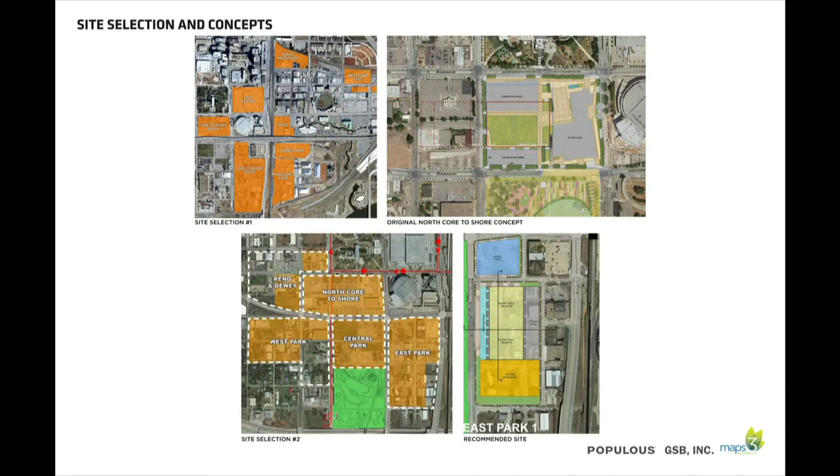Which we all know was the right move. It really has helped strengthen that idea of core to shore and development around the new park, which is really awesome.

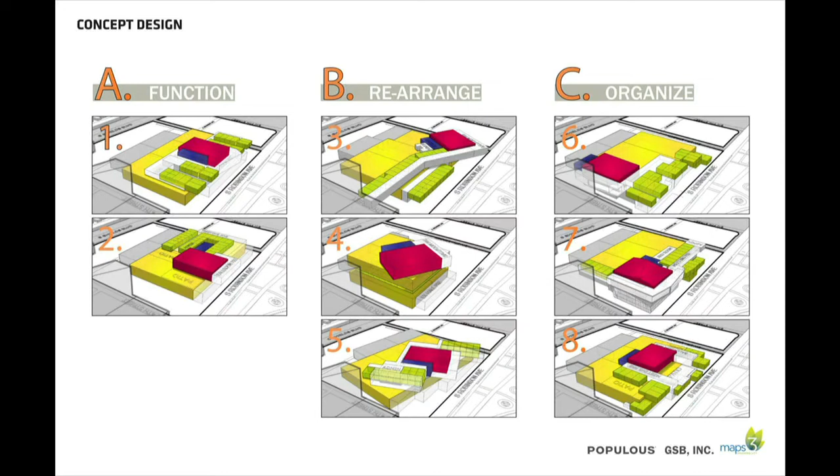So we went through a lot of iterations of concept design. We did most of this with our subcommittee, working through different stacking diagrams showing how the layout of the building could work on the site. We then narrowed that down to three specific options that we shared.

The different locations for the ballroom really stood apart among these three options: in the center, more to the north by the hotel, or to the south looking at the park.

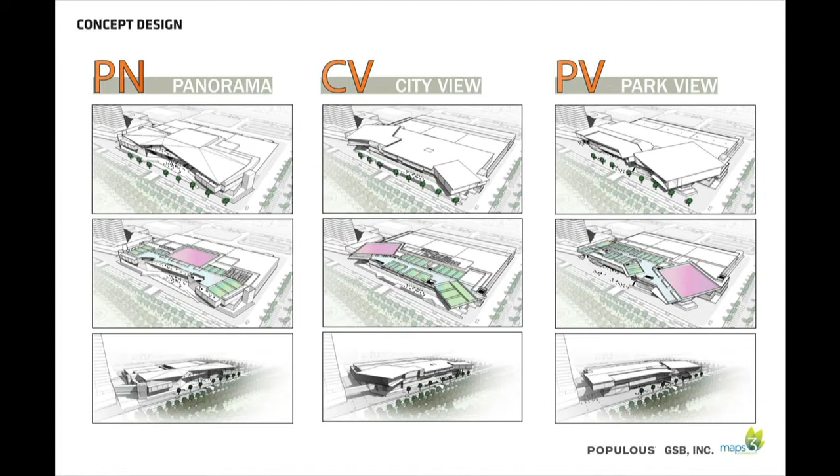We merged all three of those into one overall concept idea, which is what you see here and what we have today, with the ballroom up on the top floor, centered, with meeting space on each side and the exhibit hall at grade.

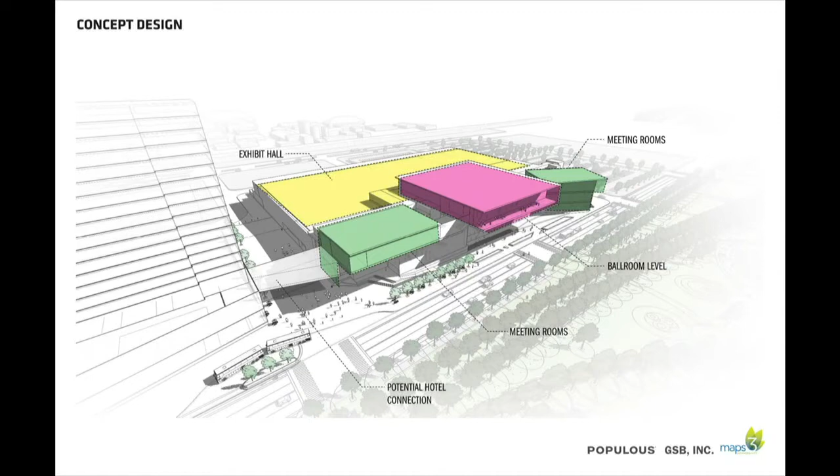The other thing we did at concept design with our subcommittee was develop these design principles. We hit on these every time we met with them to make sure we were addressing what they thought was most important for this project.

From the unique visitor experience to the pedestrian district, to division of shows, the elevated ballroom, urban integration, park connections, the ability to expand, and development opportunities.

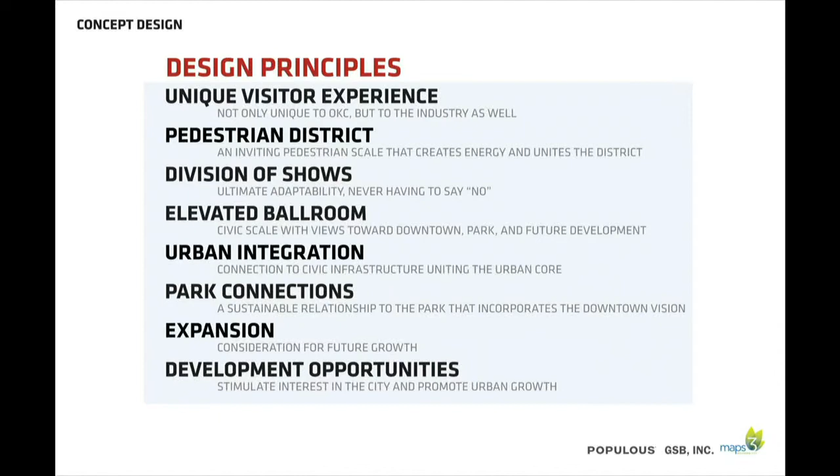Looking back, I think the project achieves all of these things today, which is great - we were able to hold these principles and carry them all the way through construction.

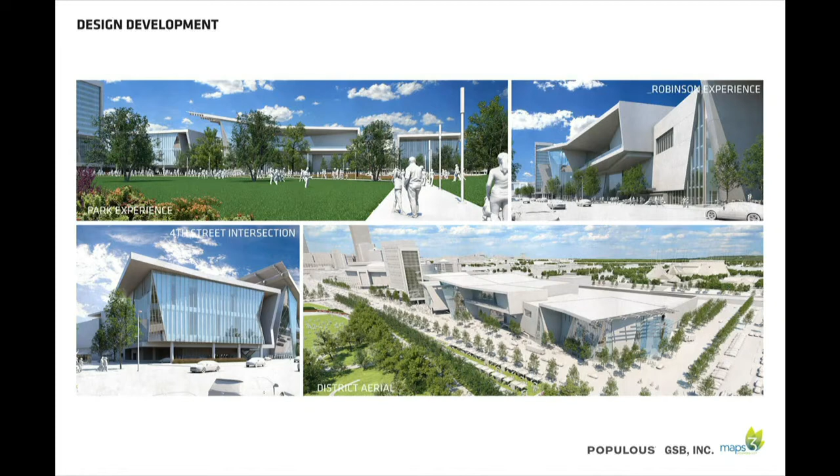The other thing we looked at was the design story for the area - the core to shore vision that the city had - and then the earth, horizon, sky design story that we added for this building.

We looked at different precedents around the city for ideas and materiality we'd seen, and different notions from the earth - the ground floor - the horizon - the level 2 meeting floor - and the sky - the ballroom floor.

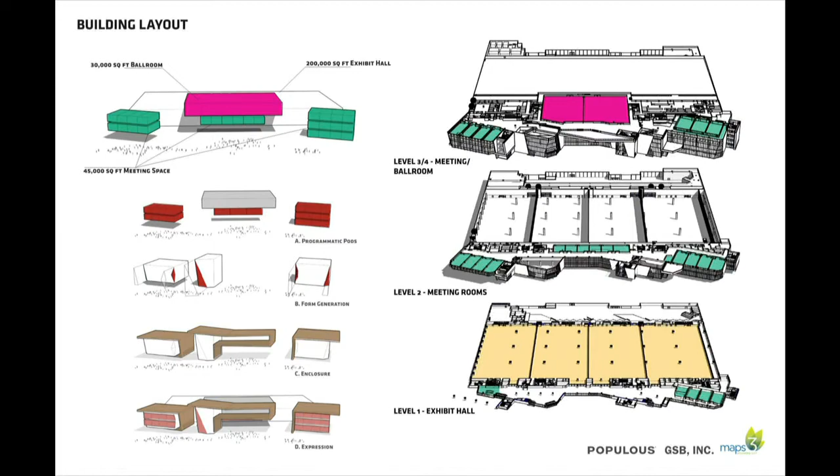As we got into construction, this building broke ground in June of 2018. Six months later, a lot of that was just clearing the site, working on utility work and foundations. But by December, six months later, we started to see things pop out of the ground.

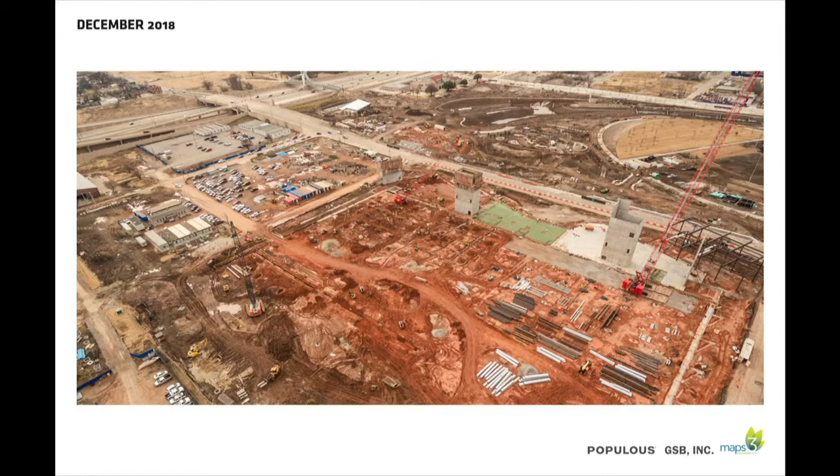You had the elevator towers going up, and you start to see some steel there at the northwest corner. Then it only took about 6 or 7 months later, and we were at the topping out ceremony of steel - we had all of the steel pretty much done in about 7 months.

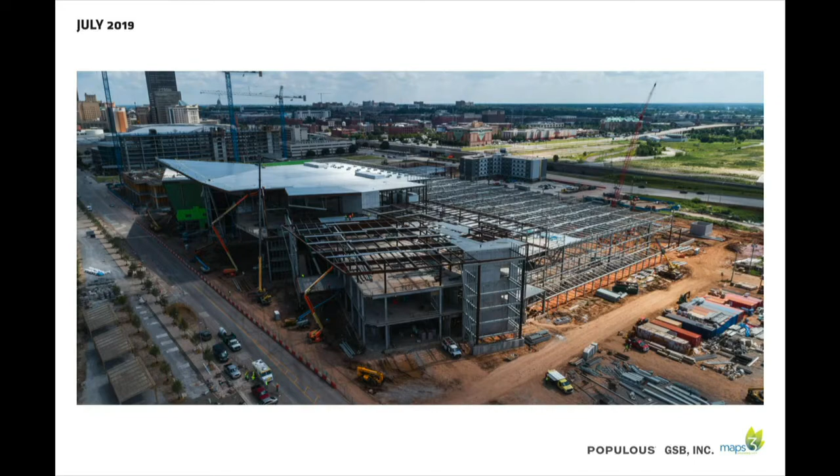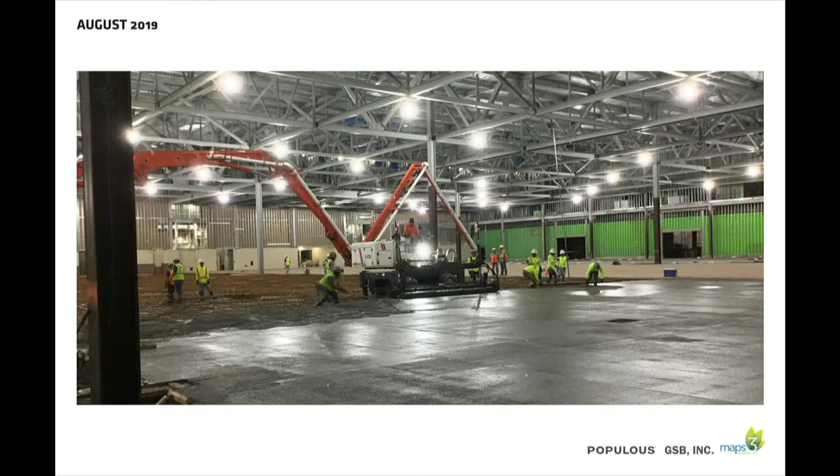The concrete was 8 inches thick and needed to be able to cure in the cooler weather. Here we are 4 months after that, and the building's basically got its shape. The roof is done, the facade is starting to go up, and we're getting into the final stretch of building out the interiors.

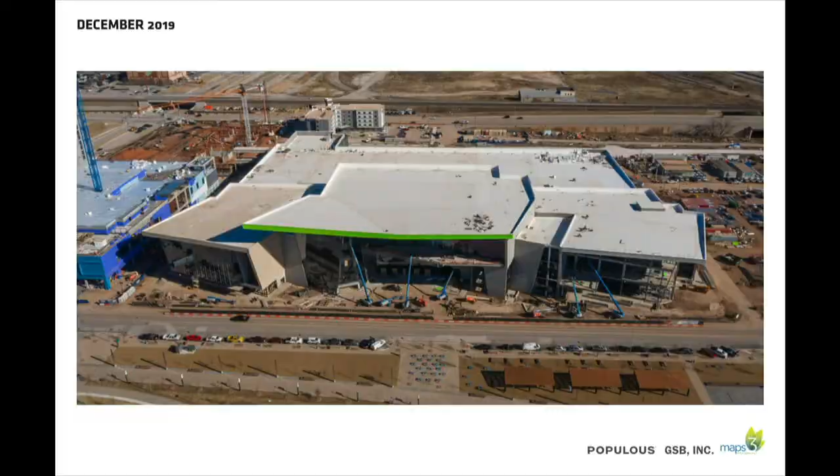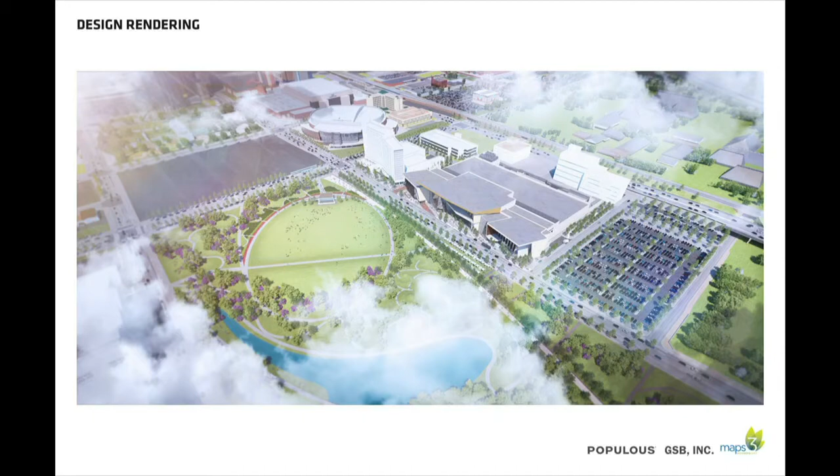Let's look at some exterior views for the project. It's really interesting to look at some of our original design renderings and compare them to what was really built out there. With this aerial image of the site, compared to what you have today, it's tremendous to see how this development has happened around the whole building, the hotel, the park, and other things that are now popping up.

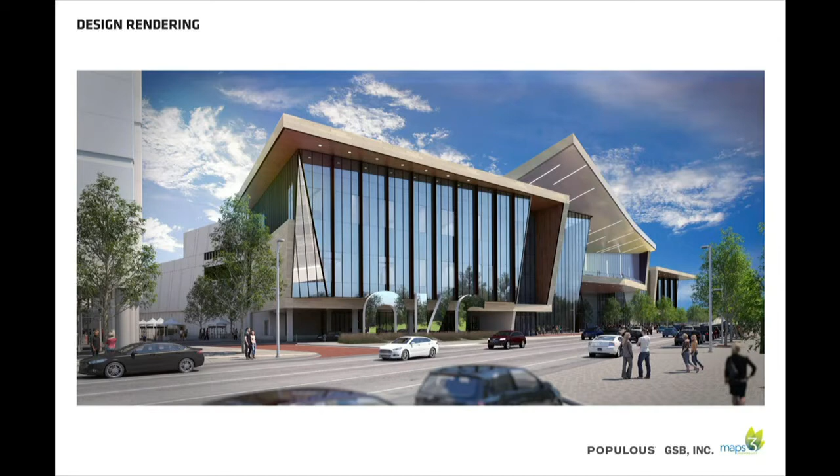This was one of our earlier renderings at the northwest corner. You see the big OKC sign—that was something we ended up not doing, along with some other small changes. But what you have today is really similar.

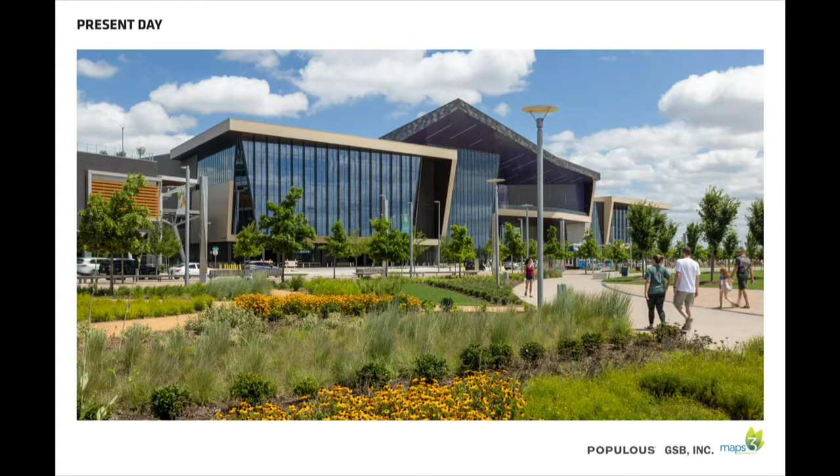It's really great to see the reflection on the glass from that rendering, and then to see it in person here. And just another view of how the park, once it got really thick and lush, really enhances the front door of this building.

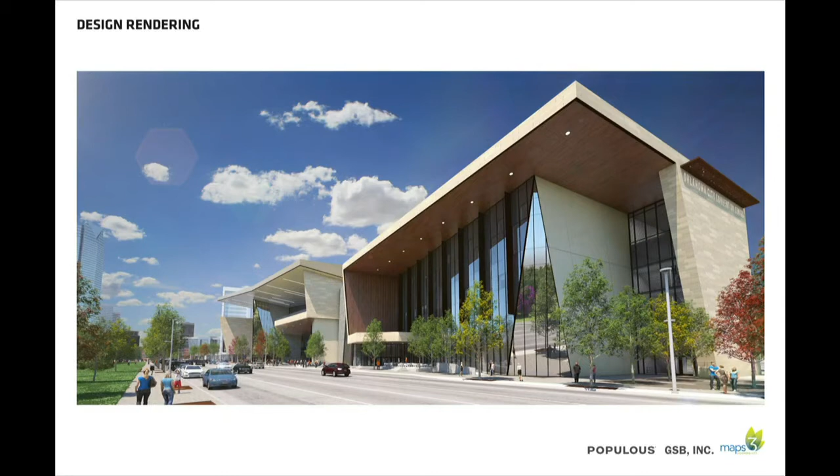Here we are at the south end, looking north down Robinson Street, and then you get that same view with what was built today.

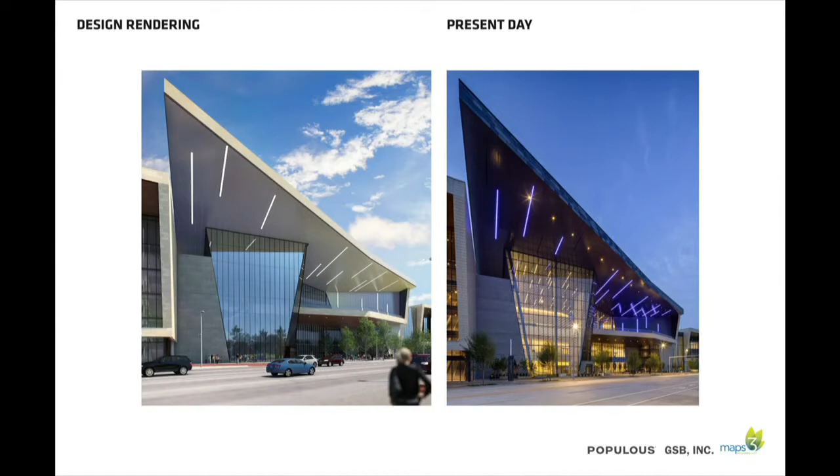The large cantilever over the building—the rendering on the left and the picture on the right—it's really impressive to see how far out that corner of the roof sticks out up and over the road. Our structural engineer likes to say it's an aggressive cantilever for the building, so I think that's a good thing.

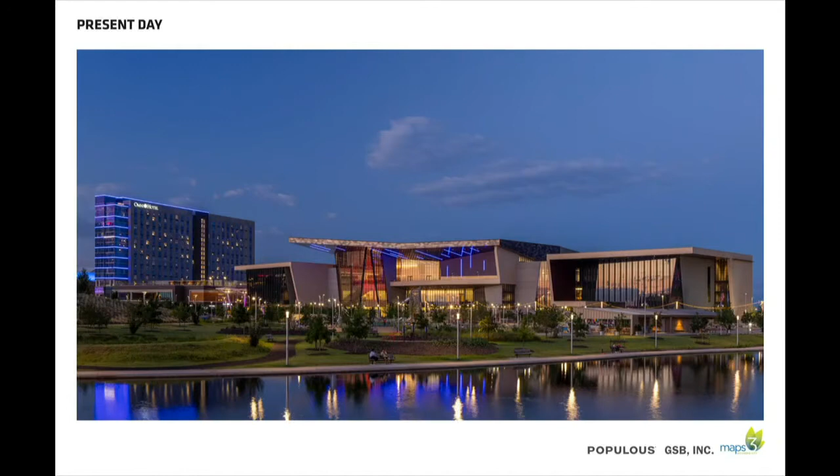And then just some of the wonderful views from the park, with the lake in front of it. And the lighting at night—how this building, the hotel, and the other buildings in the area really talk together with their looks and their lighting.

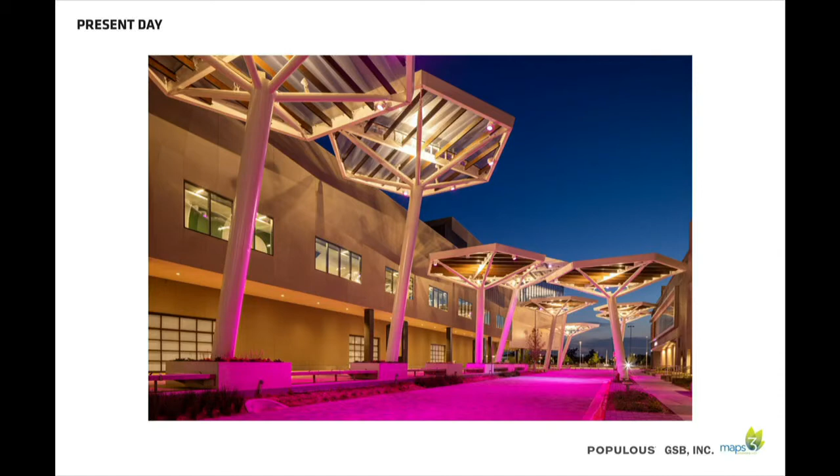The 4th Street canopies were one of the additions we added to this building because of some additional funds we had. Adding these amenities on the north side is really neat and dramatic.

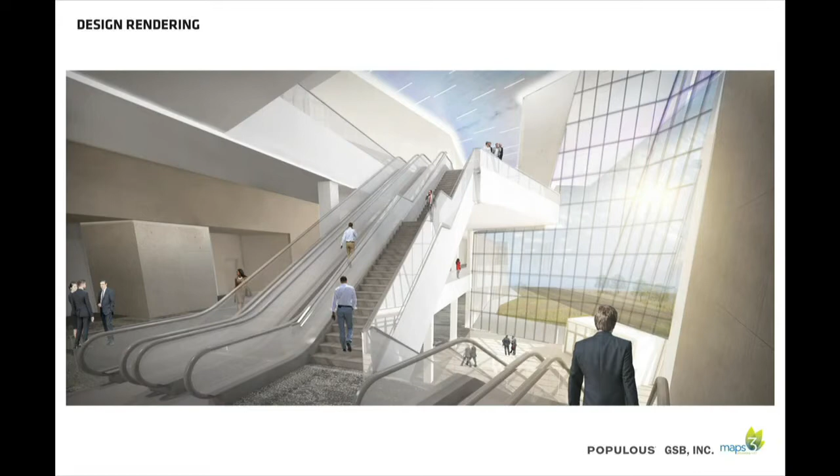You get to see the floor, you get to see the glass, and then here it is today—you get that same sense. But the addition we didn't have in the rendering is that art piece, which is phenomenal at both atriums. Having the virtual sky piece in there just fits so perfectly in the space.

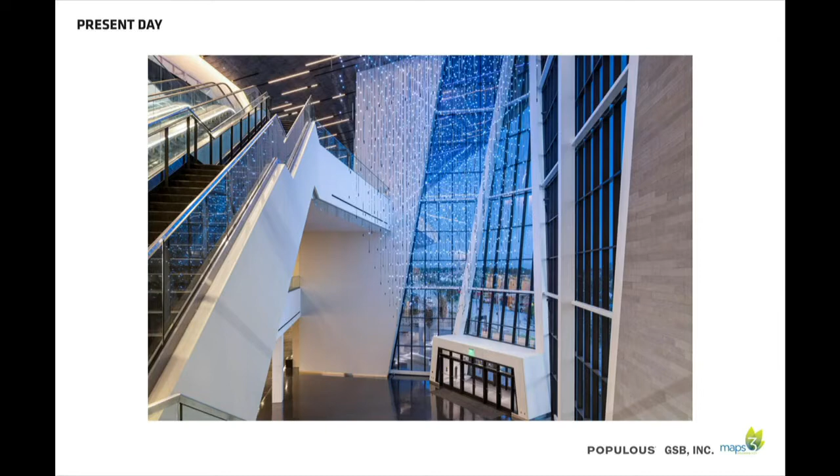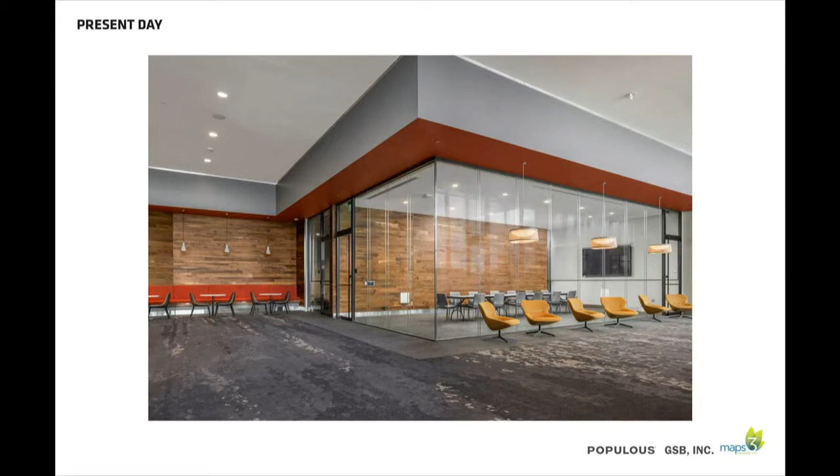Up at level 2, looking towards the north meeting rooms, and then what that space is today—the wood, materials, and colors.

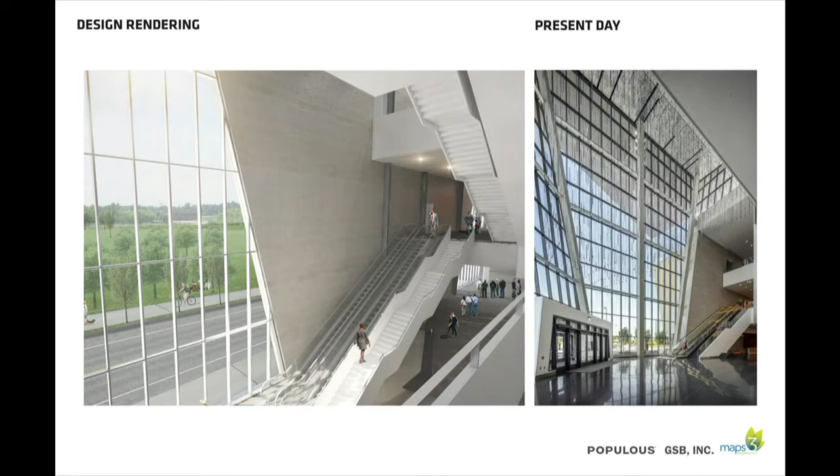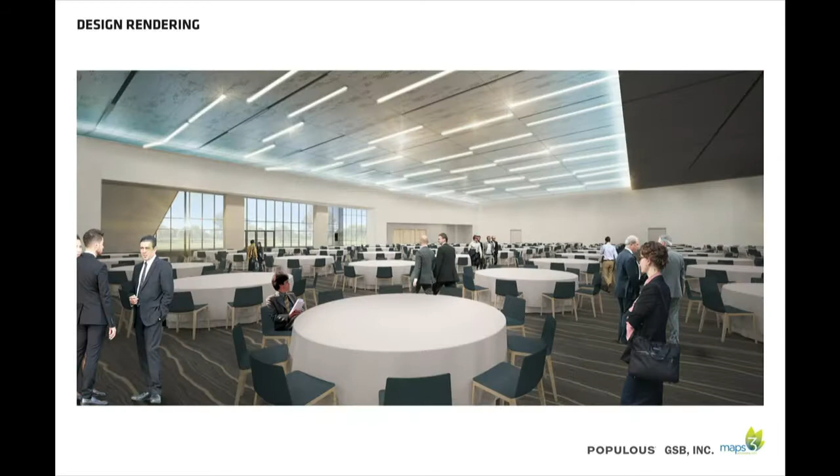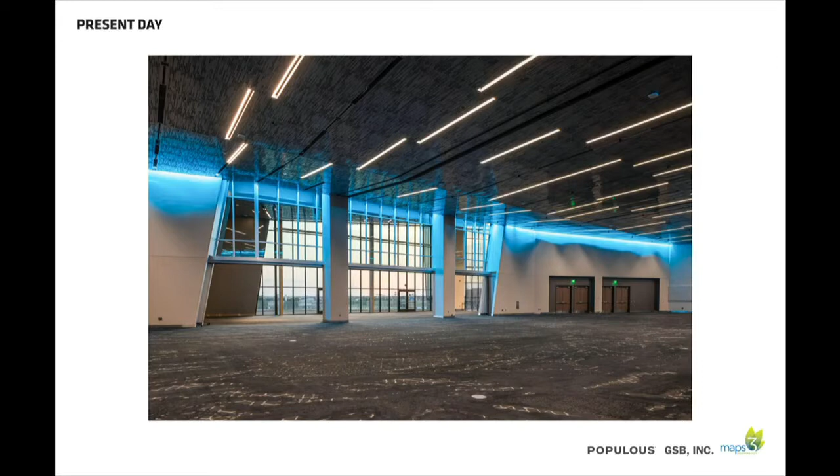This is inside the large ballroom in a rendering, and there it is today. What's really unique is how the glass opens up and gives you the ability to reach out into the pre-function space and then to the balcony.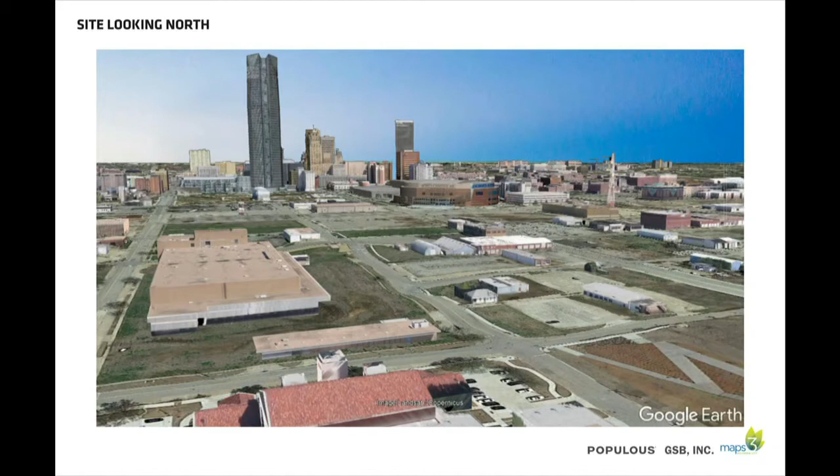And so here we are at completion. This is an old Google Earth image I found a while back, showing what was out there before all this took place, a lot of which has to do with the park. You remember there was an old OG&E building there to the right and a big substation. Those were big elements that had to get relocated and moved along with other old buildings and facilities not being used in that space.

And just what it is today, how this has transformed, it's amazing to think what's changed and what's in front of this building. There's no other convention center in the country that has a front door with this in front of it, a front yard like this.

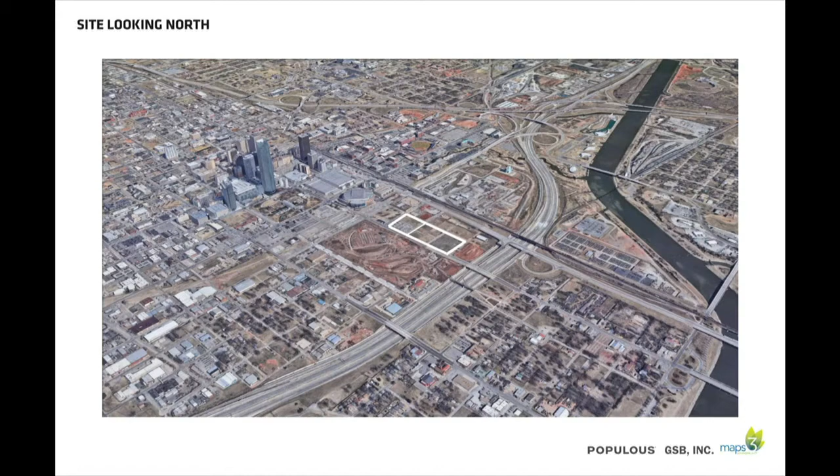And then just a quick aerial. We actually had drone aerial shots taken a couple months ago. We wanted to explain how the city's changed with these buildings being put in place. So here's the aerial from about 3 months ago, and it's amazing to see how downtown is reaching south, and now with the new lower park finishing up too, it's going to be even better all the way to the river.

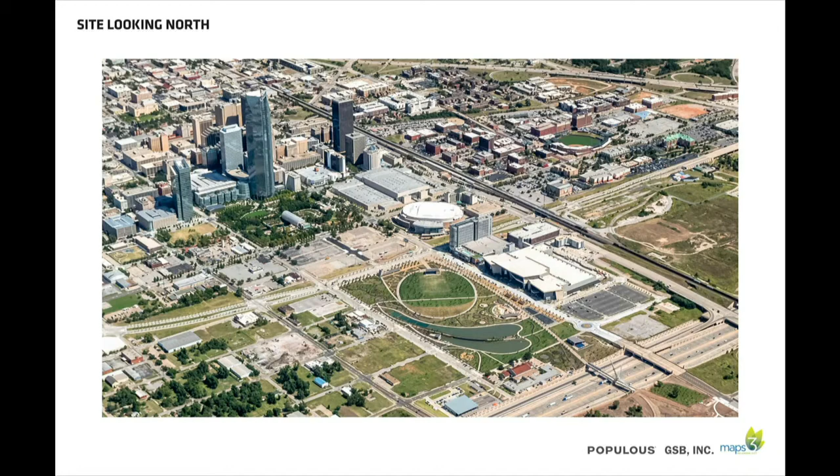So let's hit some statistics real quick. The project budget was $288 million. Construction budget was $194 million. With Flintco, their bid came in at $168 million, so $26 million under budget. The building opened in December of 2020, and the grand opening was a couple months later in March.

On this project, we had 41 total change orders, totaling $14.3 million. But of that, $12.7 million are added enhancements that you guys were able to put back into the building. This ranges from a new elevator to a distributed antenna system to the new canopies on Mick Cornett Drive and utilities and all sorts of other things that went in around this building. And to have that extra money there, it just really let you kick things up that much better.

And something I'm super proud of: of the 14.3 million in change orders, only 1.3 were things we needed to correct or fix in our documentation. No documents are ever perfect, but we tried really hard and had the time on this project to really get things done as best as they could be done. I'm really proud to say that was less than 1% of the total project cost, so that's a really big thing for us.

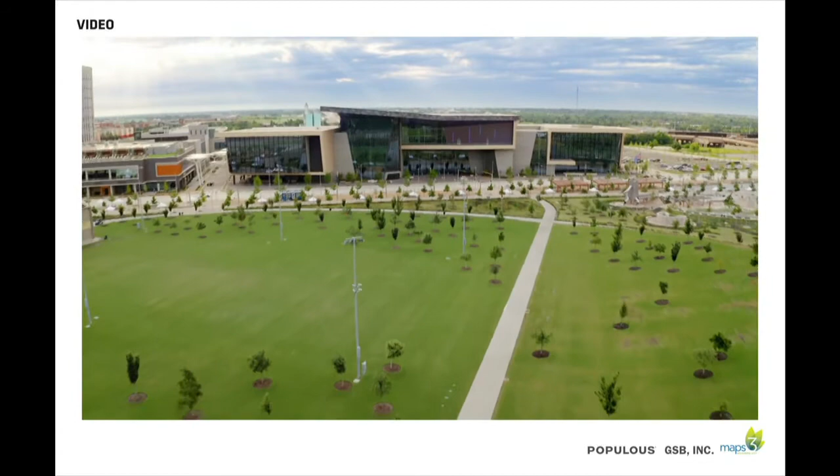So it's really great to see the spaces, you know, the outdoor spaces, and some of those people actually were using them and using them the way we had intended. There were food trucks along the street, like we had worked with the park team to coordinate and let people be able to leave the convention center and go outside and do some stuff out there. So it's a super success. We're super proud of this building and super proud of what we've helped you guys do here.

So that's it, I think, for us on this project. Questions or comments?

I want to make this comment, Kevin. This isn't my first time seeing this presentation. We had it at the Convention Center Subcommittee this week, and we were all, in David's words, taking a victory lap. We were feeling really great about the timeliness of it, getting it done within budget, and getting all the enhancements we had hoped for but didn't know we would get.

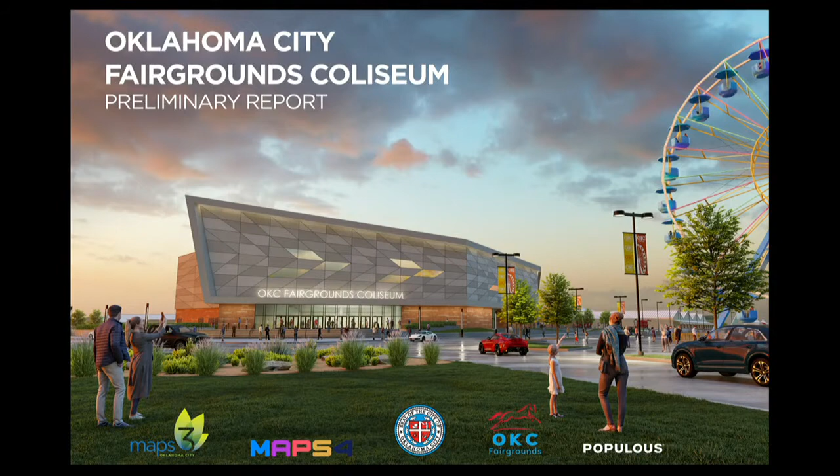Here we go. So we were here last week giving you a design update on this, so a lot of this will be really familiar content, but hopefully some new content as well. This one is for the preliminary report approval, so we have a little bit of additional content in here that we'll walk through. So we'll just go ahead and get started.

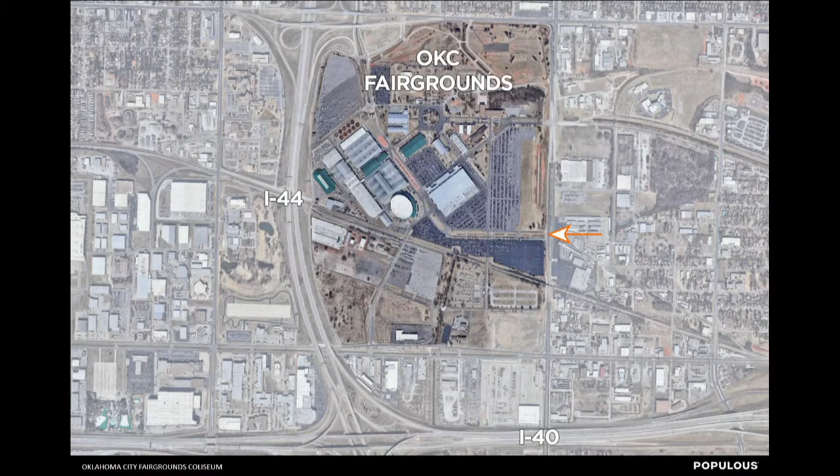Just to give us a sense of place as we get started, we all know where we are out at the fairgrounds. We've got I-44 running on our west corridor, and I-40 on our south. Our main entry is right there off of May Avenue on Gordon Cooper Boulevard, which you can see with that orange arrow. As we zoom in to our immediate project site, we've got the Norick Arena, which we're replacing.

As well as the Super Barn just north of that, and the Bennett Event Center right adjacent to our project. We all know about the Norick, built in 1965. Currently has the largest economic impact of any public facility in OKC. That thing is full all year round with horse shows, livestock events, sporting events, and all kinds. We call it the horse show capital of the world, so a big impact on that project.

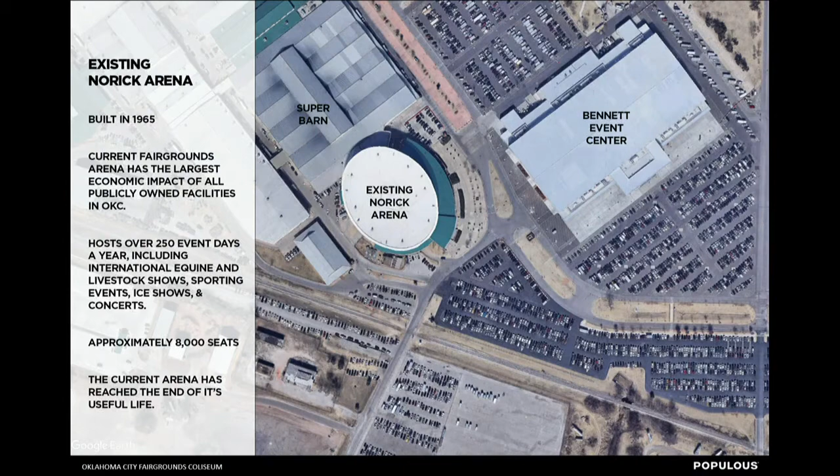As well as high school basketball, graduations, wrestling, and other events like that. Approximately 8,000 seats in the current facility, and as we know, it has reached the end of its useful life. The new Coliseum is planned to go directly southeast abutting the Norick. The intention of this location is that we want to keep the Norick operational throughout the construction of the new Coliseum. We've got long-term contracts there at the Norick that we don't want to interrupt, and so the intent is to keep that operational throughout construction. And then once that new Coliseum is ready to go, to take down the existing Norick Arena.

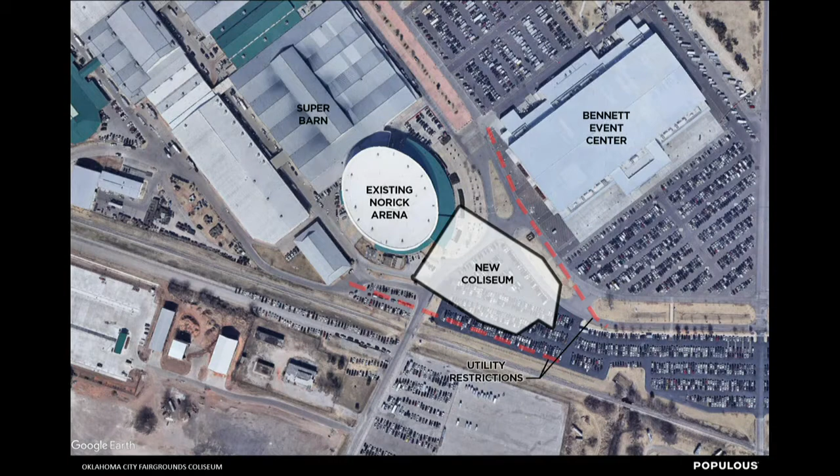You can see a couple of our big utility restrictions there. That's kind of what guided how far away from the Norick we could pull that Coliseum, as well as the shape of the new Coliseum was guided by that a little bit. So you can see a little bit of overlap with the existing Norick Arena.

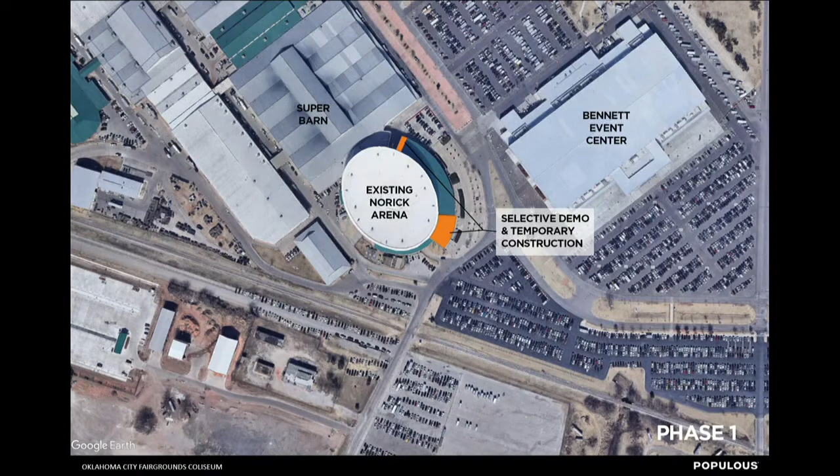So that leads me into the phases that this will be done in. We'll have four phases. The first one will be the selective demolition and temporary construction of that entry area where we are overlapping the Norick, and a relocation of some of those egress and entry elements to the north side of the building. The second phase will be the construction of the new Coliseum, and along with that, we will have a temporary connector that will connect the Super Barn to the Coliseum during the demolition of the Norick.

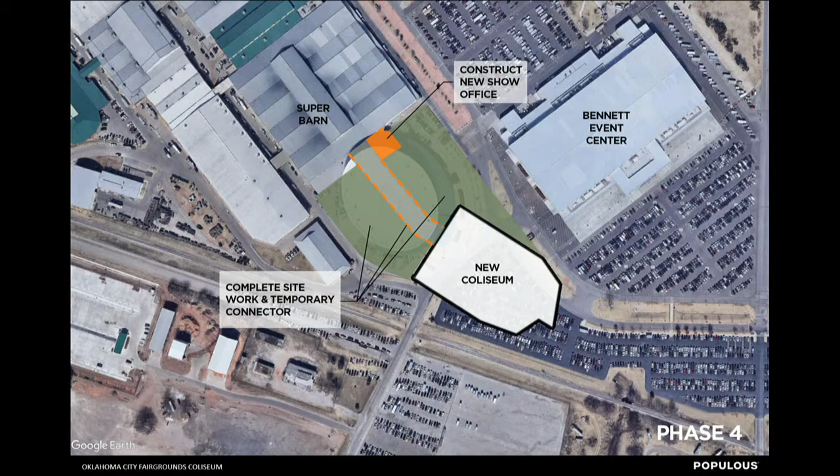The third phase would be the demolition of the Norick Arena. And the fourth phase is the finish out of the site work where the Norick used to be, as well as the reconstruction of a new show office there connected to the Super Barn that is currently housed inside the Norick Arena.

So as we zoom into our site plan here, you can see our built structures there in orange and our surrounding plaza spaces and green spaces. You can see our entry coming off of Gordon Cooper Boulevard there on the right side of your screen. It's going to be a really nice entry sequence as you come in off of that main entrance and are greeted right there with the entry to the new arena, as well as the Bennett Center right there adjacent to it.

To kind of cap off that Gordon Cooper Boulevard entry sequence. On the north side, we've got our flexible plaza space that leads out to the fairgrounds, our entry plaza there on the east, and then on the south side is kind of our more utilitarian functions with our loading dock and chiller yard. On the west end, we've got a little bit of a blank slate there with just some simple paving and a concrete sod pad, knowing that that's where our future connector building will be that will connect the Super Barn to the new arena.

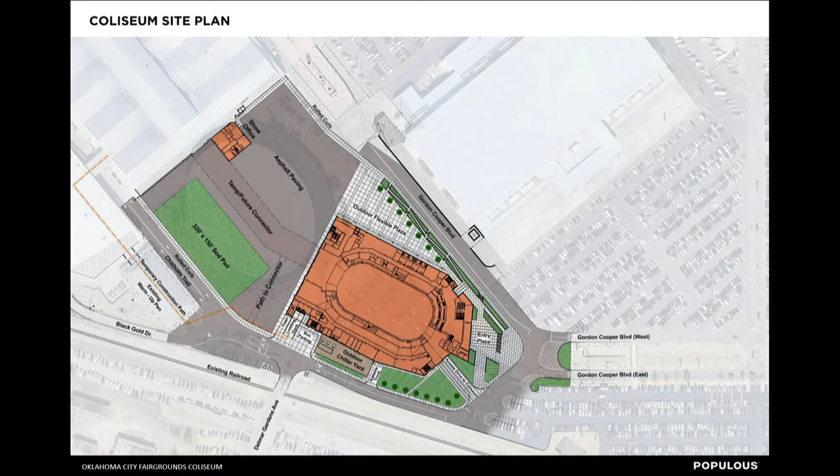As we zoom into our floor plans here, we've got two floors on this building, a main event level floor that's on the ground level that you see here, and then the concourse level above that, which is where the public access to the stands will be. So I'll kind of start on the right side here at our main lobby and walk our way around some of the major spaces.

As we enter the building on the right side, we've got our ticket office there in green, as well as a retail space directly above that. Up on the north side, the top of the screen there, we've got our locker spaces and kitchen. Our north lobby is on the upper left of your screen.

We've kind of got two lobbies to this building, which is one of the things that makes it unique. The main lobby on the right side is where the public entry and ticketed access will be. The north lobby on the left side is where competitors and people coming from the Super Barn and the fair side will enter into the building.

Just below that, we have our back of house north area. That big back of house area leading straight into our arena floor is one of the things that makes this unique and helps keep this as the premier spot for horse shows, livestock shows, and things like that. That's where they'll set up their events, with the rodeo set up and different types of penning in that area.

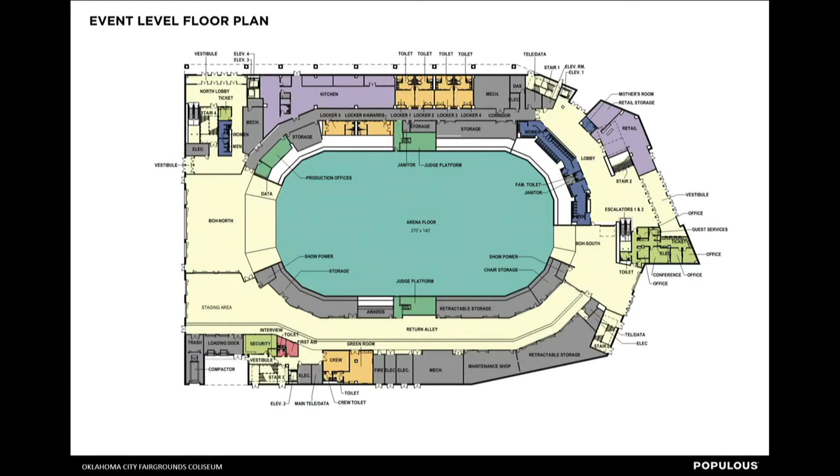Competitors will go through the arena floor there and then out the back of house south on the right side, and then back around the return alley that you see on the bottom of the screen. That nice big return alley is another thing that really sets this arena apart for those types of events. And then on our south side is a lot of our utilitarian functions - storage, maintenance, loading docks, and things like that.

As we get up on the concourse level, there's a big main grand staircase on the right side of your screen that leads to a nice big open concourse on that end. We'll have vendor spaces there on the right side of your screen, as well as our big main public bar in purple, on the south side of that grand stair.

Coming around the concourse, it's really a pretty efficient plan here. It's mostly comprised of concession stands, which we've located in the four quadrants of the building, as well as restrooms, and then some premium spaces like the lounge space that you see on the left side that leads into the loge seating, and the suites that you see on your lower right side.

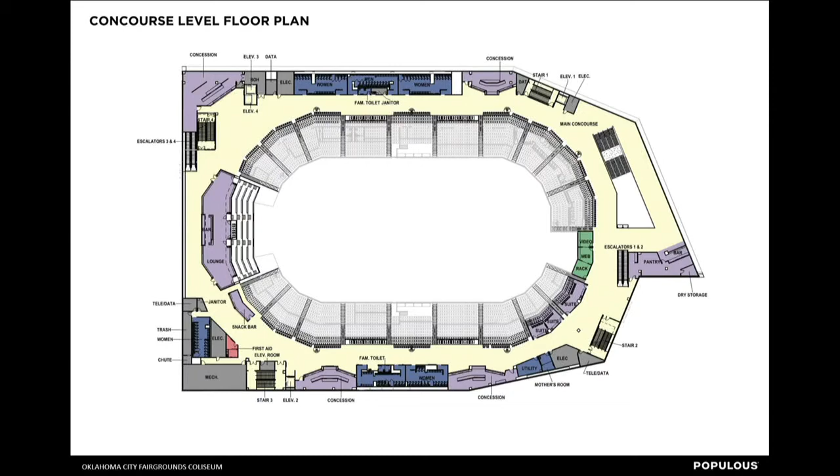We've got a small video production space there on the right side as well that'll be housed just perfectly to get a good view of all the competitors coming in, as well as any end-stage events that happen on that left side. We know this is a multi-purpose arena, so we're just showing you a few of the functions we can have.

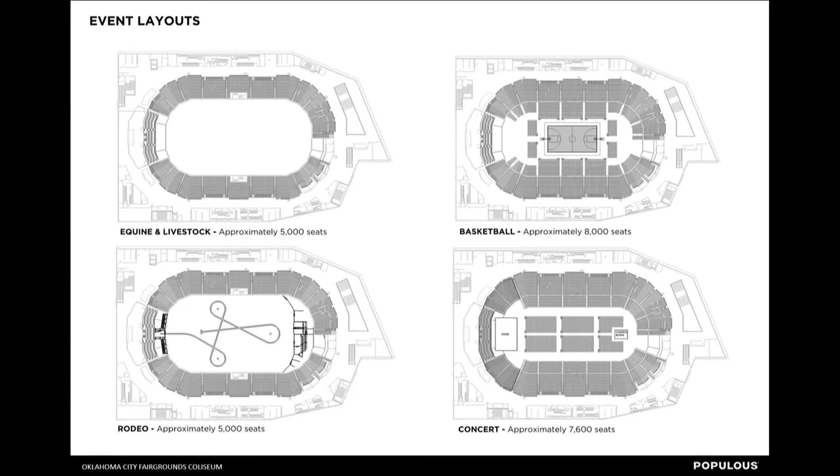This varies in the amount of seats and occupants we have in the building. Our standard equine and livestock setup is shown on the upper left with about 5,000 seats. That can expand out to about 8,000 seats with a basketball or concert arena setup, shown there on the right side.

Getting into the architectural form and design of the building, when we reimagined this with the new MAPS 4 budget, we took a step back, and once we had the floor plan we liked, we started from scratch and laid a really simple and efficient structure on top of this thing, extruding those lines up from the floor plan to give it some shape and a starting point of a really efficient envelope to go from.

From there, you can see the progression on these three images. On the third one, we start to delineate some of the shapes. We start to integrate roof wells to house mechanical equipment more efficiently, windows and things like that.

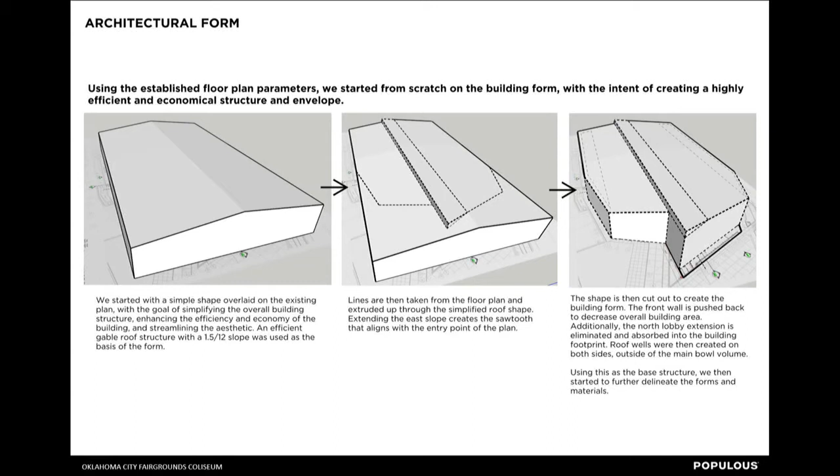And then we start to think about our materials. We're in the State Fairgrounds campus, so we want to be considerate of their palette of materials that are out there right now, consisting mostly of masonry on the bottom and light upper metal panels on the upper portions, as well as what kind of new materials we need to bring to this building.

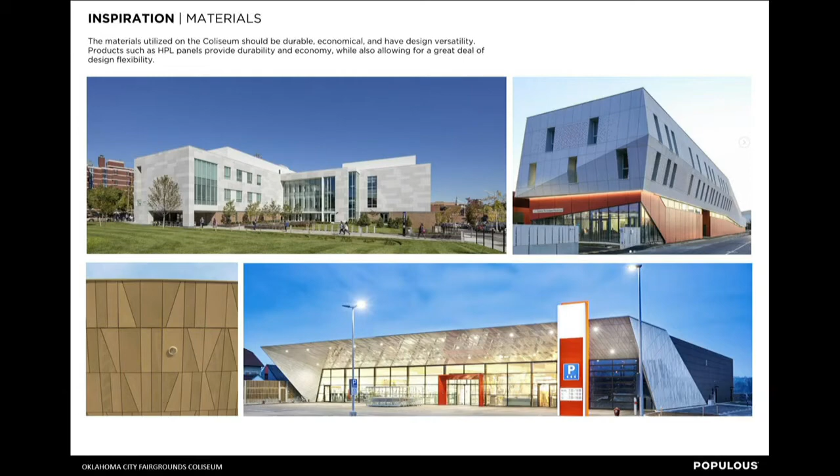We knew we wanted something economical, flexible, and durable for this building. So we're looking at materials like these phenolic panels that you see here, which can meet all those criteria. And then just the inspiration of the project - what do we want those panels and materials to look like?

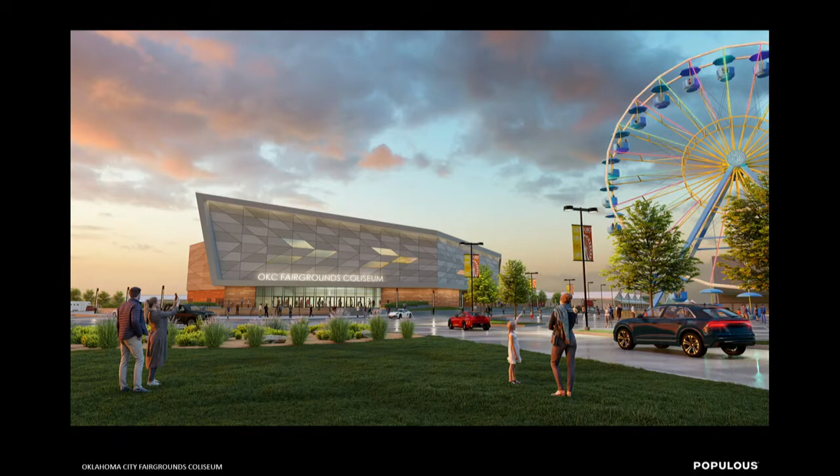That is in the preliminary report you're being presented with. You can see those phenolic panels and that pattern, that influence of those patterns on the upper portion of the building. That's really our defining feature, and it's grounded with that masonry base that you see on the bottom, which is really durable.

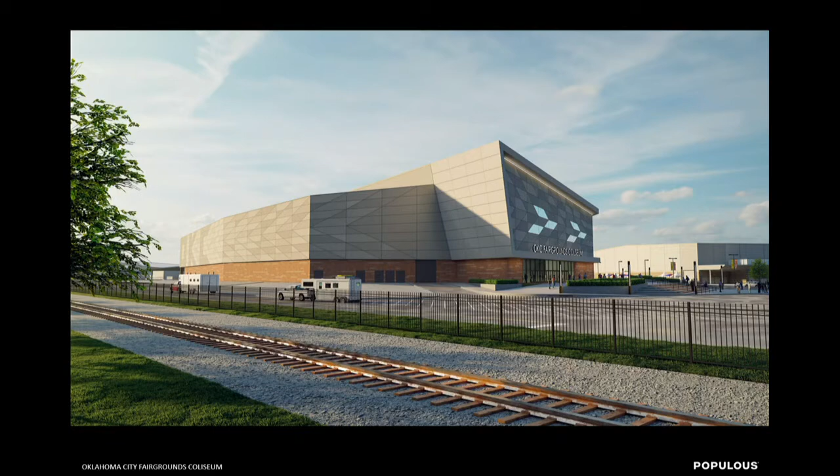That's why that's seen so much throughout this State Fair campus. With all the equipment and animals we have around here, durability is a key element to these buildings. So having that base both grounds the upper element and also acts as a really functional building material for us. As we wrap around the south and west sides, that paneling continues around the side.

We've integrated a nice graphic element with a big OKC that you can see on the left. Something large scale that we hope you can see from I-40 and I-44 as you're coming around the building on the highway, as we saw in that first slide.

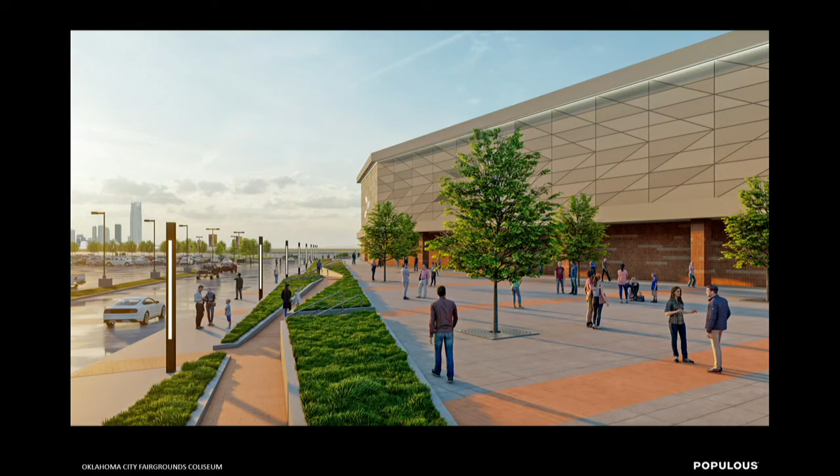And then we've got a nice big flexible open plaza space facing the fairgrounds side, leaving that open so they can bring their trailer exhibits or any type of fair exhibits or vendors they want into that space and utilize it in a number of different ways.

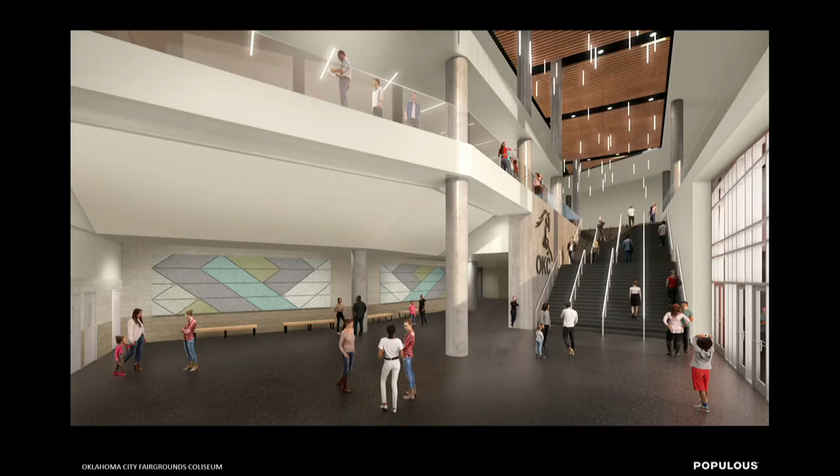As you enter the building, you're greeted with a nice big open full-height lobby space that will open up to the concourse above. We'll be able to see up to the concourse and down below into the lobby space in that area.

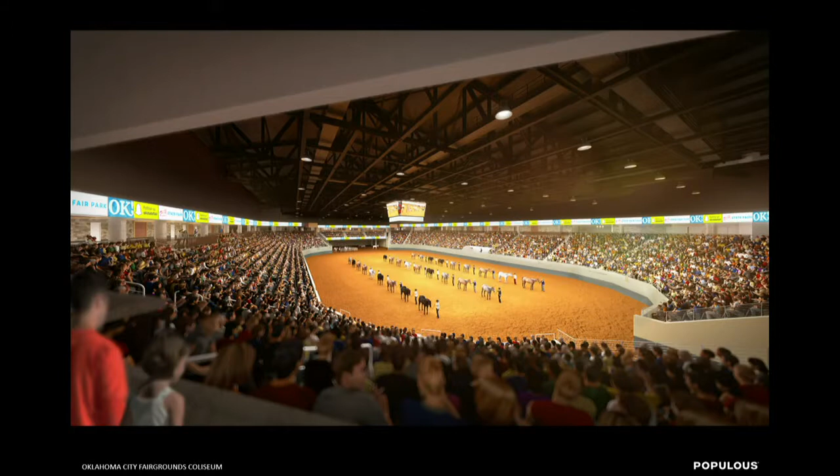And then our main bowl - we've got about 5,000 permanent seats, as you can see here in this layout, with a little bit over 50-foot clear height to our structure above, which allows us to do any of the events we want to have in this facility.

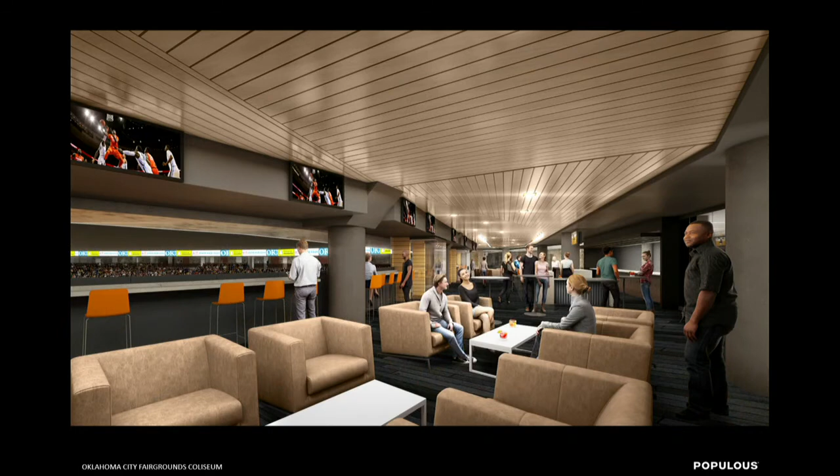And then we've got some of those premium spaces like our lounge space on the northwest end of the building that we've integrated along with our suites.

So right now, construction budget for this project is $84 million. Our latest estimate puts us just under that. We are carrying 5 alternates currently, which are all equipment and signage alternates. I won't go through each in detail, but...

Basically what we've tried to do is parse out what are the elements within that package that are essential for the building to operate, and we've included those in the base bid. Then we've broken out a portion that are kind of the extras we know we want to include in the project, but right now we've split them off for budgetary purposes as part of the alternate.

So for the signage package, for example, all of our code and wayfinding signage that will be required for the building to operate is in the base bid. It's the extra decorative signage and graphics packages that are in the alternate.

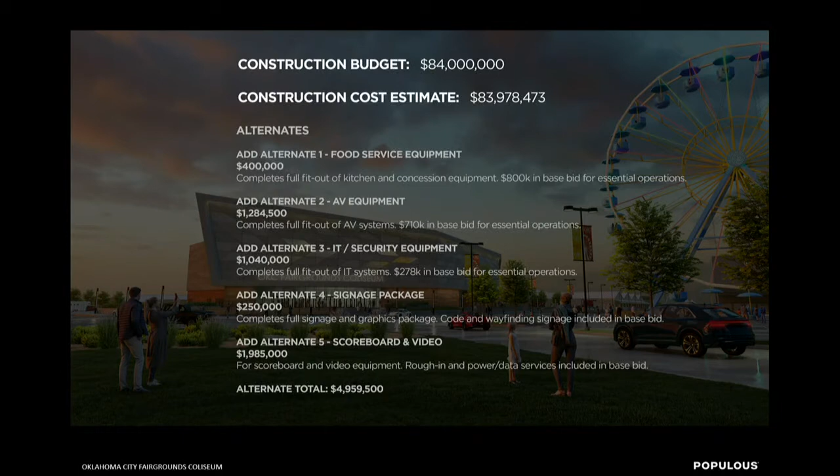And then our anticipated schedule - we are hoping to get the preliminary report approved here today and next week in December of '21. That'll put us starting on our final construction documents next year in January. That planning, review and permitting period will take us into July, when we'll start bidding. Bidding will happen in August, and construction is planned to start in September of '22.

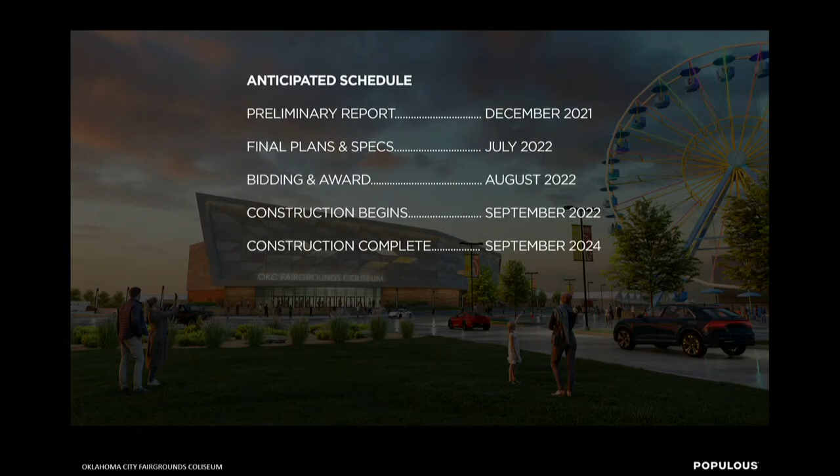In latest conversations with the fair, I believe the hope is that they can operate this next fair with the existing fairgrounds as it is before it gets under construction, and as soon as that is completed, kick off construction. So that should time out pretty well for them.

So that's where we are today. Hopefully that gives everybody a pretty quick explanation of where we are and what is in the preliminary report, and I'm happy to answer any questions you may have.

Questions? I actually have a couple, if you don't mind.

We are going to lose quite a bit of parking from this being constructed in that area, and we know how condensed parking is pertaining to special events. So I'm curious to know what we are going to do to ensure we're replacing most or all of those parking places for folks to be able to participate.

They have expanded parking in other areas south and west for the fairgrounds events. We have not heard that as a concern from the fairgrounds, the loss of parking they're having there for their events. That's never been a concern I've heard from anybody at the fairgrounds. We can definitely check with them and see if that is a concern, and look at those expanded parking spaces to the south and west of the railroad as potential opportunities to accommodate for that.

Part of what helps with that is some of the work we did, I don't know, 8 years ago, along with the Bennett - we did all that parking south and east by the Bennett, where the racetrack used to be. We added I don't know how many hundred spaces in there, and that was part of their master plan. So we've got all new parking back in there - if there's strictly an event for the Coliseum, there's tons of parking in there. If it's for the fair, they always have the perimeter parking and everything. So it's part of their master plan.